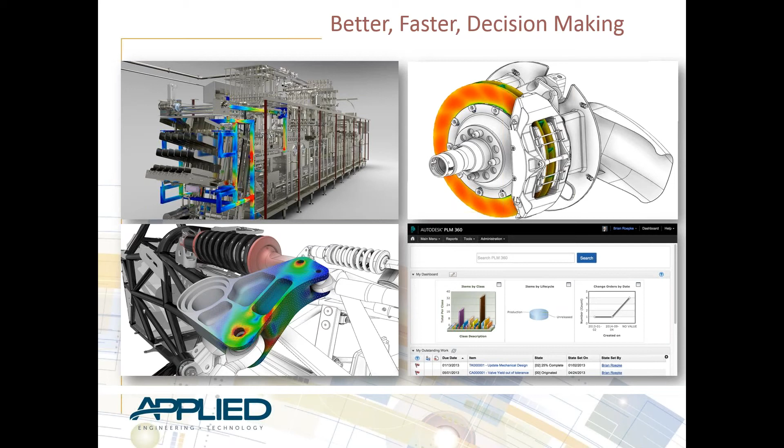So first and foremost, for process disruptors, we talk about fabrication. If you go back 10 years ago, how many people were using CAM software? Probably not many. I know there were a few, but today, in subtractive manufacturing, or CNC, we're seeing a lot more CAM. Computer-aided manufacturing uses computational power to generate tool paths for parts. Because of this quick nature and the ability to utilize the knowledge of the computer, we're able to start generating more complex parts of higher quality.

If you take that a step further and look at the new additive manufacturing, which is the trendy word for 3D printing, I think we have all seen this technology just explode. We have the ability now to print composite materials such as carbon fiber. We have the ability to print metals. We even have the ability to print organic materials now. Just the other day, I was talking to a baker who went to a bakery convention, and there's 3D printers now for cakes. They're 3D printing wedding cakes, which I think is just incredible.

So I think we all know 3D printing is here to stay. It's past just being a trend, and it's becoming much more mainstream. It's something we use for prototyping all the time. This is something that helps us create higher quality products. It helps us minimize the physical testing required, along with FEA analysis. Fabrication is really coming a very long way.

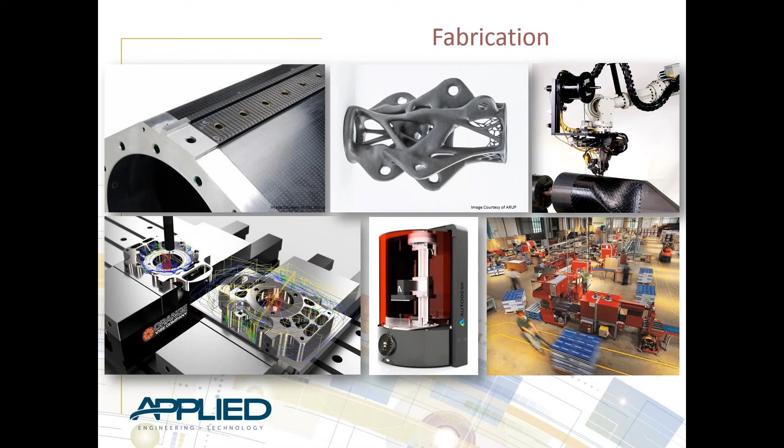Digital and physical convergence. This is the idea of doing more in a digital world, right? And that connecting with the physical world. In the past, if you think about a typical process maybe 10 years ago, it's, well, let's draw our design, let's generate that design in 2D in AutoCAD, and then let's make that design in our shop, and then let's apply some loads and pressures to it to see if it breaks. Kind of like the old school traditional process. And I know a lot of people are still using that process.

But now in today's age, we can do a lot of upfront testing. We can do a lot of upfront visual work for marketing material. We can simulate things before creating those physical prototypes to kind of eliminate some of that. One of the coolest technologies I think that's coming out, and I've seen become more popular in the last, I want to say, 2 years, is virtual reality and augmented reality.

And so that is the ability to, I guess, do one of two things. Virtual reality, you're putting your user in a 3D immersive world where everything is computer generated. I've seen a lot of aerospace and automotive manufacturers use this technology to prototype vehicles, right? They have kind of little mock-ups, but they use virtual reality to sit in a car, look at the dashboard, look at the rear of the car. They're looking to make sure it's visually acceptable before they even produce anything in the physical world.

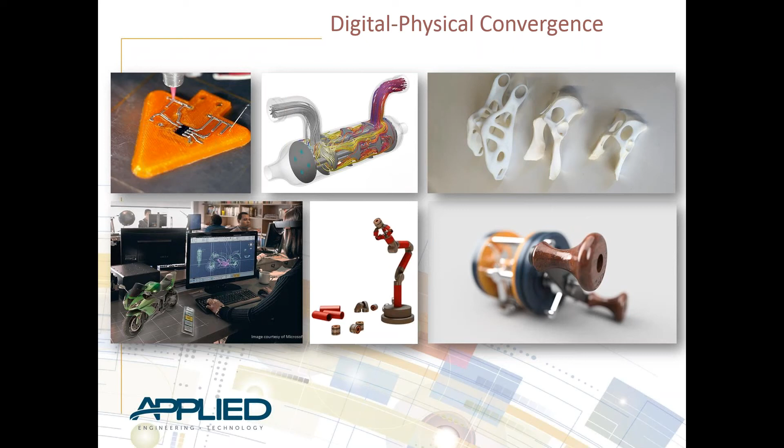So there's two things I want to talk about today when we actually get into the technology. With all those things I just talked about, we really kind of think back, well, how can I actually incorporate some of these new trends into what we do at my organization? The first being automating the collaboration between sales, design, and engineering. What I want to talk about here is a tool called Configurator 360, along with Inventor, and how these two work together to provide not only a cloud, mobile, and social application of collaboration, but how we can actually tie in sales to the process.

And so if we think about automating this process, think about your typical bidding process within your organization. You typically would have some sales personnel. They go talk to a customer. They get some information from the customer. They come back, and it's basically the telephone game. They take that information and share it with engineering or design, and it's a lot of back and forth, right? That's the portion we want to automate here, and that's what I'm going to be highlighting.

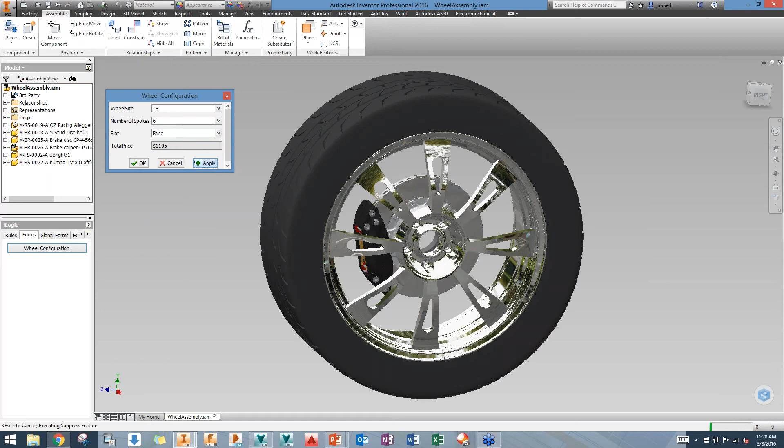If I change the wheel model from size 22 down to 18, I change the spoke size down to 6, and I turn off the slots and I hit apply, here's what happens. Inventor sees what I've done, it goes into my rules, and it understands that if these all change, then this has to change. And then it just republishes my new CAD geometry.

You'll also notice here the total prices are read-only. It's taking into account the information I've put into this form and giving me an estimated price of this configuration of this wheel. So that is really the iLogic portion inside of Inventor.

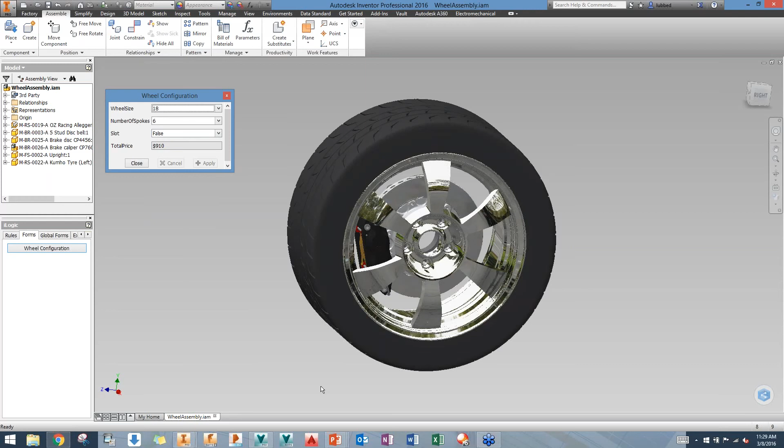When we want to push this out and make this accessible to other types of users outside of engineering, that's when we can get into more of the Configurator 360 application. So inside of Inventor, you have a button that allows you to publish your design to Configurator 360. I'm on the back end of Configurator 360, signed in as an administrator right now. So this is the administrator's view.

And you'll notice right away that this is built into a browser. So this is your cloud. This is your mobile accessibility to that same configuration you were seeing inside of Inventor, only now it can be accessed outside of the four walls of your organization. It can be accessed on your phone, on your tablet, on your work PC. You can even embed this into your website and have it do configurations directly in front of the consumer.

So you can have the consumer basically log on and say, oh, I want to configure a wheel, so I'm going to go through and choose exactly what I want. It's a more interactive experience for your actual customer.

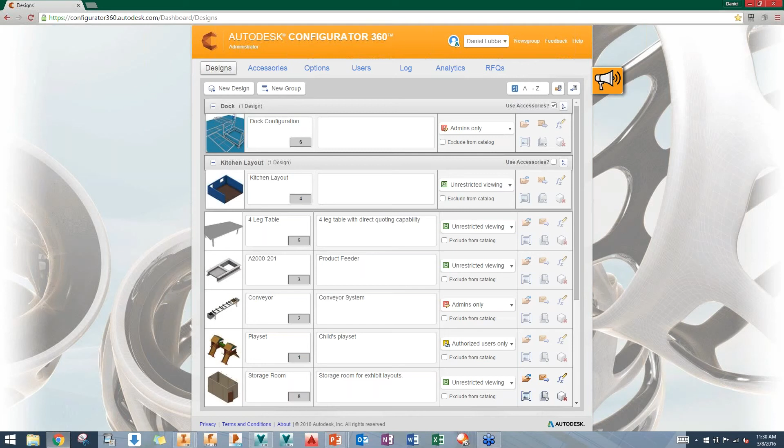Now, some folks don't go that far in giving the configuration ability to the customer, but they do give the configuration ability to the sales folks. So sales folks will sit down with their customers and do it together, maybe on an iPad or whatever, and they'll be able to configure this live with their customer, making sure they get all of the requirements, because they're basically going down a form A to Z.

So you'll notice in here I have almost like a product catalog. I give a lot of demonstrations of this software, so I have a bunch of different types of data being shown in here.

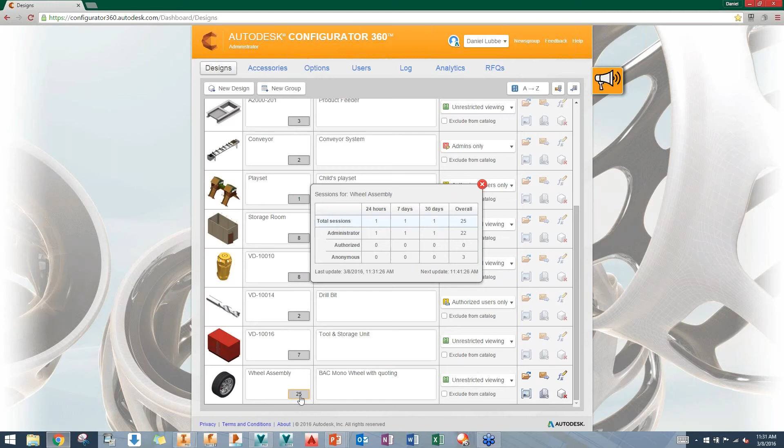But at the very bottom, I have this wheel assembly, the same exact model you saw inside of Inventor. And on the back end as an administrator, I can see the number of sessions that have been initialized, right? How many people have gone in and actually configured this model. It's nice to be able to get some metrics to see what's most popular, right? So you start to build off of other data that you get inside of this configurator to understand which products are more popular than others.

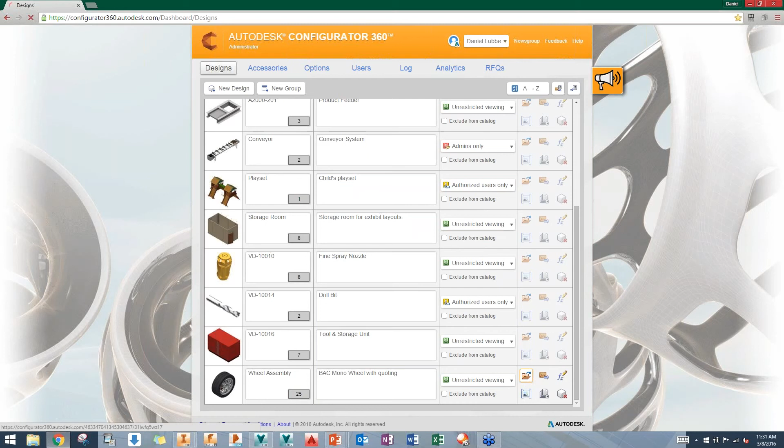But if I go to the actual view that the consumer would see, I'm going to click on this Go to Design, and this is going to open up Configurator 360. And what you're going to see here is the wheel in the center of the screen. So I'll kind of zoom in a little bit here. And if I let this sit for just a second, this is actually being run on Autodesk servers. Autodesk does not have access to your data. It's a secure location that only the administrator of your Configurator 360 tenant has access to.

So as this updates on the screen, you'll notice on the left-hand side I have 3 buttons. The very first one are the options I have to choose from. The second one is the ability to download information. So I'm still waiting for the screen to update. I've kind of already clicked through some of this stuff. But what we have here is somewhat of a sales tool, right? We have the ability to gather the requirements.

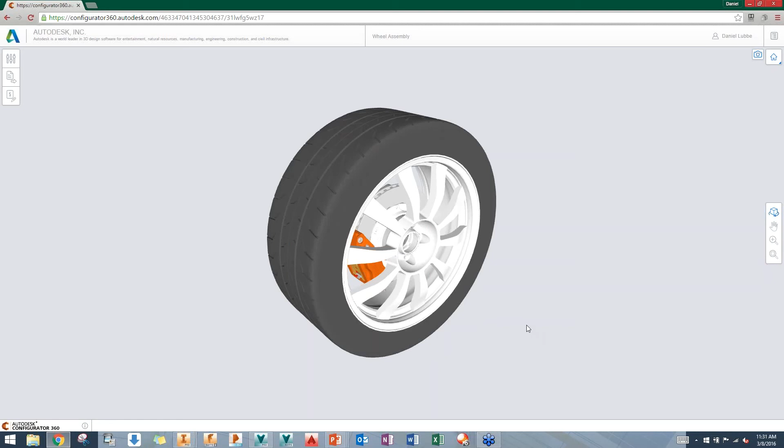We're giving the end user the option to download, and we specify what types of downloads they can get, right? Can they get the pricing information? Can they download an Inventor assembly file? Can they download a STEP file, right? Think of all the opportunities you have to utilize that download option.

When you have customers calling you saying, hey, we really like your product, but we want to have access to 3D CAD models because we want to be able to put your product into our design. How do you guys do that today? I feel like a lot of the customers I talk to are, well, give us a call and we'll have someone from engineering produce a STEP file, and then that person will email it to you. That's pretty common, and I think it's pretty cumbersome. You're taking time away from the engineers for a very mundane task. It's an important task that needs to be done, but is it really something that engineering should be doing? Configurator 360 gives you the ability to kind of eliminate that, automate that process.

So exactly what you're seeing here. I have all of my options listed here, even some additional ones inside of Configurator 360. The ability to choose my brake material, my wheel finish. You can group each of these parameters into different sections, right? You can also have cascading drop-downs. So if I choose this, then my next list has to be these items, right? So you can start to build out whatever your form is that sales goes and talks to the customer with. You can take all of that information, you can build it into this interface.

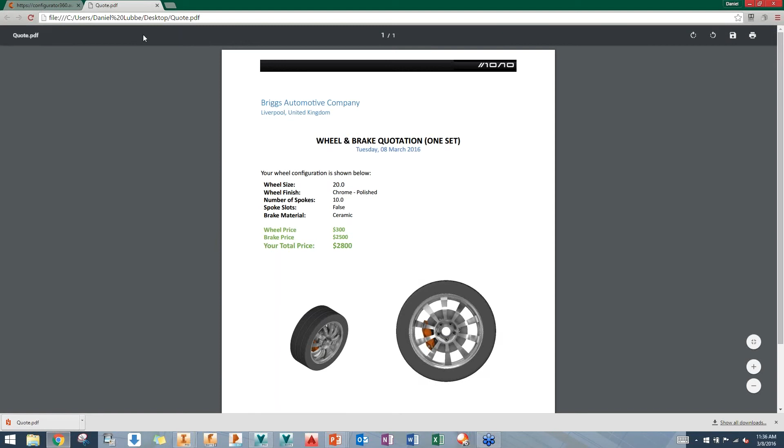This could be the sales rep on the phone with the customer or sitting next to them, helping them configure the product, putting in requirements, and then pulling down the appropriate pricing information right there on the spot. Again, pricing information does not have to be incorporated into this tool, but I feel like that's a very powerful thing to add if you have the ability to do so.

So that is Configurator 360. Again, you can access this anywhere you have an internet connection. Right? So again, tablet, mobile device, laptop, computer, it doesn't matter. As long as you're connected to the internet, you can access this configurator.

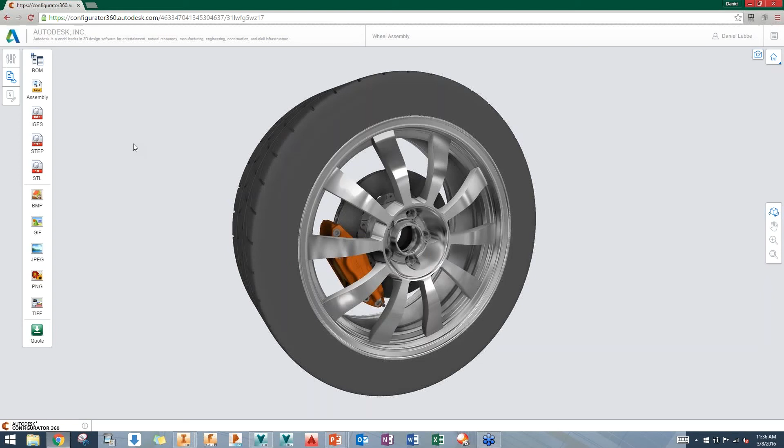So I'm going to back out of here and go to PowerPoint and move into that next piece of technology that I think most people are on this call for, to be honest with you. Generative design and shape generation is very neat technology, and it's making its way into mainstream, just like that configurator tool. If we move to the next slide here,

Shape Generator is a tool that basically aids us in design. I don't want to say that it's going to design for you. It's getting close to that Staples easy button, but it's not quite the easy button yet. What this allows us to do is take a block of material inside of my assembly, right? I know this block of material is going to be fixed here. I know a load is going to be applied here, right?

With those real-world conditions, I'm able to input that into Shape Generator, and using a Nastran solver in the background, it will gather the most rigid shape it can find to support the force and the fixtures that you've put into that blob of material, right? So it sounds kind of mundane, but when you really think about it, it's optimizing our design. It's using FEA in the background for us. We're not having to do FEA to find the shape we're looking for. We're allowing the computer to do it for us. All we're doing is putting in real-world conditions.

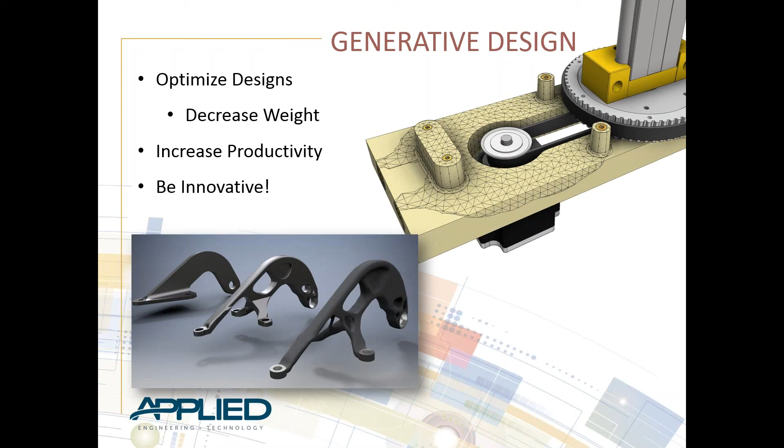But in the meantime, I look at this Shape Generator inside of Inventor as more of an aid in the design process. So let's take a look at how that is actually done inside of Inventor. I'm going to come to this Inventor assembly. I'm trying to minimize the movement on my screen, especially in CAD, because I know that if I rotate and it looks nice on my screen, for you guys it's going to be just a blurry mess.

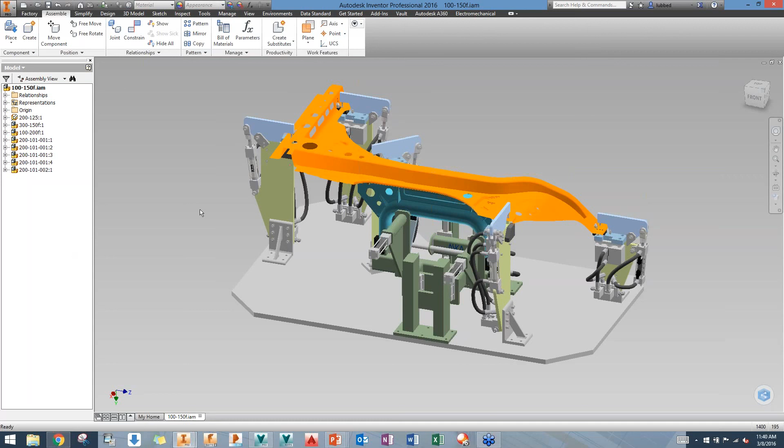What we're looking at here is a jig assembly that's holding a sheet metal part. Let me zoom in here. If we look at this component here, this one hydraulic jig on the left-hand side, there are many of the same, but if we just look at this one, notice this green block in the middle.

That is one enormous structural member inside of this jig. And there's some forces being applied to this. The jig is actually coming down on top to clamp down on this sheet metal part. Wouldn't it be nice if we could just remove some of that material? And most folks would say, well, yeah, I'll just put a hole right in the center of it. Like, yeah, you could do that.

Absolutely. You could run some FEA on it afterwards to verify. But is putting a hole right in the middle actually the best place to put the hole or to remove material? That's where Shape Generator comes in. I can take this bracket. Let's actually open this bad boy up.

What I'll do is I'm going to come into this individual part. I'm going to turn this to the side a little bit. I'm going to let my screen update for a second.

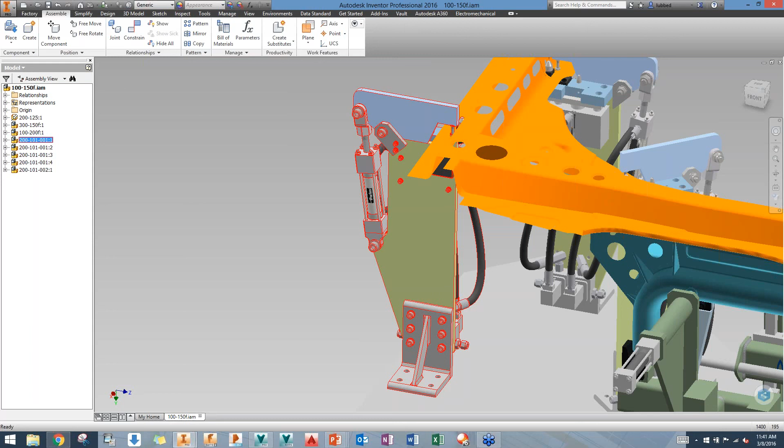Sorry, guys. My Wi-Fi I thought was pretty good, but it doesn't seem to want to update very fast. Okay, so I've seen it. Okay, so we're there.

So here's my part. Again, I know that I'm clamping on this top little extrusion in the upper right-hand side of my screen. What I'm going to do inside of my part is I'm going to go to Shape Generator. And what this does is it actually almost opens up. It's basically prompting me. Let me see here. I just pulled this part out of Vault. Okay.

So it's actually bringing me into somewhat of an FEA-looking environment. For those of you who have used FEA, you even see an FEA type of icon, and it says analysis in my tree on the left-hand side. But really all we're doing inside of Shape Generator is we're working from left to right. Just like all of our FEA tools, we start by assigning material.

So I come in here, I'm going to assign just an alloy steel material. I'll come down here and choose that. And this may be a little behind. I'll try to go as slow as I can. Once material has been applied, then I can come to constraints.

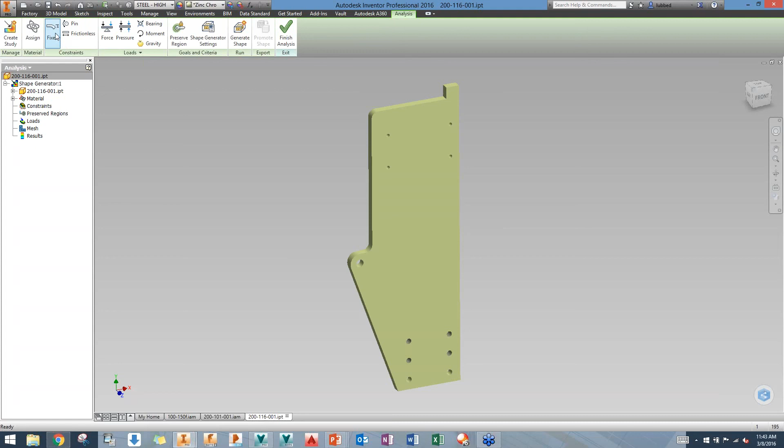So where is this thing being fixed in the real world? In its real world condition, it's being bolted to brackets that are attached to the skid. So I'm going to grab these 6 holes here, and I'm going to say these are fixed in place. Okay, so we know where that thing is being fixed.

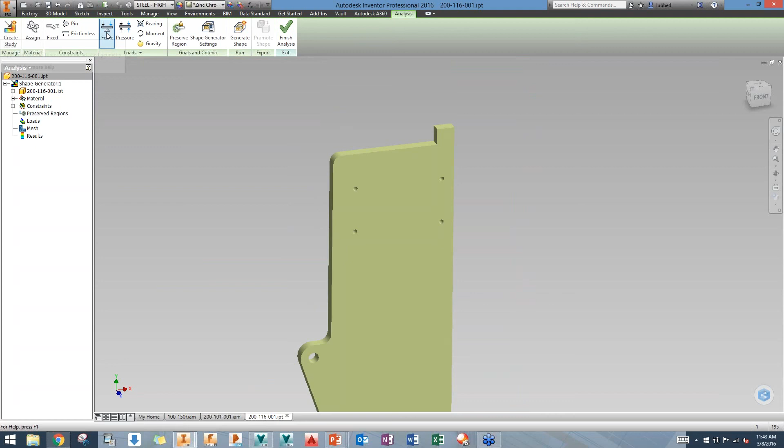Next, where is force being applied? Well, I know I have almost like a piston over here, and we'll say that this piston is putting on 1,000 newtons of force. So we'll apply that. And then at the very top, we have these 4 holes that have additional forces being applied at each of these faces.

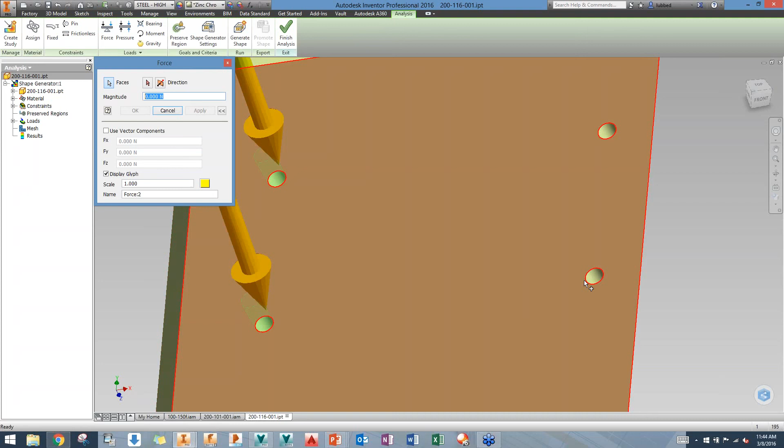And here you'll notice my force is at an angle. I can specify an edge to make sure that these forces are going down. And here we'll say the magnitude is 300. Right, so again, I'm just applying my real world conditions.

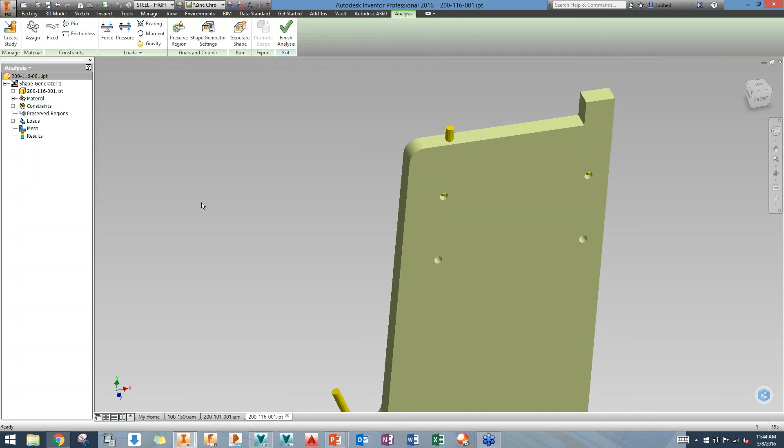Now, I could run this right now with Shape Generator. What it's going to do is maintain the faces that I've selected. I've selected where the forces are being applied. I've selected where this part is going to be fixed, and it would maintain those circles and those holes. But I want to make sure that there's more material around those holes. So what we have after we apply force is preserve region.

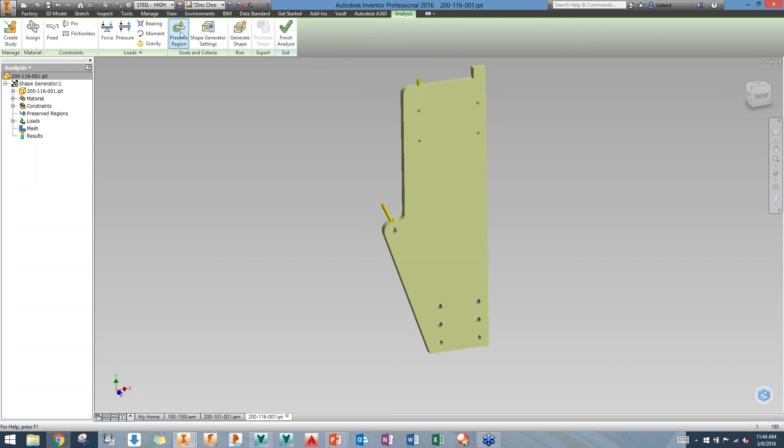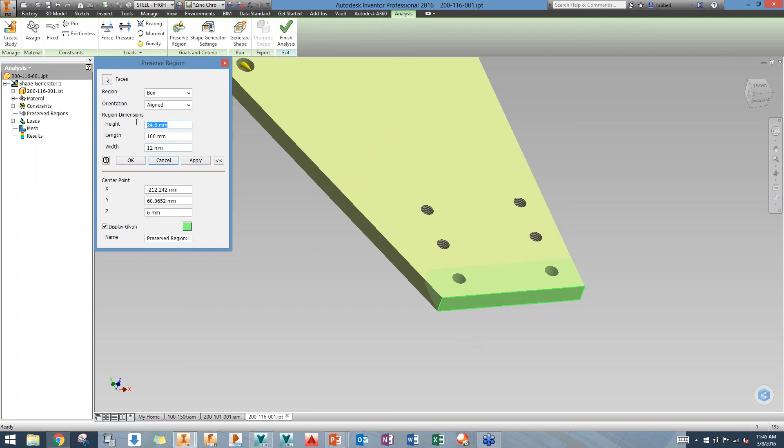And so what I can do here is choose an edge. And what this does, and it may be kind of hard to see here, but I can actually choose material that's in my quote-unquote blob to maintain. So what I'm going to do here is make this box a little higher. I'm going to change the height here to, let's go 90.

And I don't know if you guys can see this. It's probably kind of hard to see, but I have this highlighted green area. This is almost like a keep out. Like, hey, when you go to remove material, don't remove any of this material. So I'm going to apply.

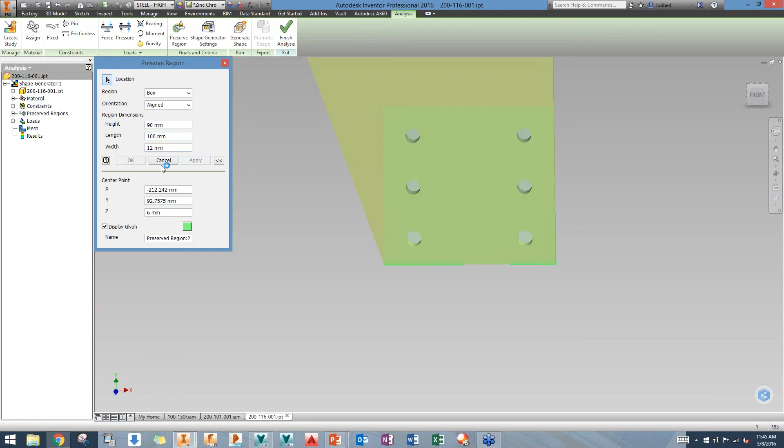Then I'm going to come up here. I'm going to choose this edge right here. So I'm going to grab preserve region again. You'll notice when you grab an edge, it makes the appropriate diameter. So I'll apply that one. I'm going to come up here, grab this top face, let's move this one down 70 or so, just to make sure that we're capturing where that clamp is actually coming down.

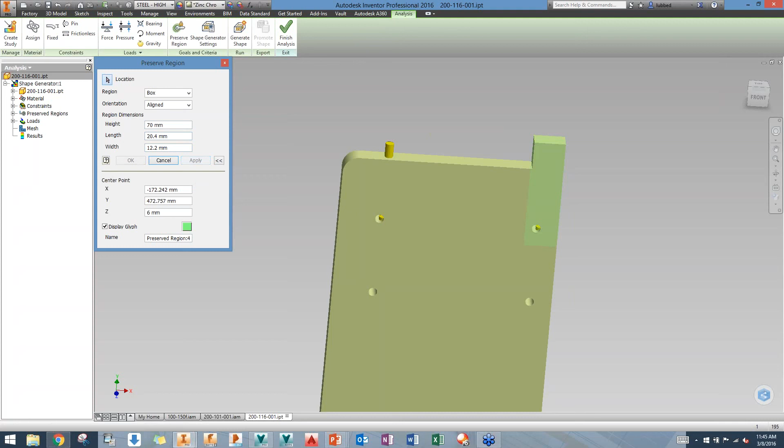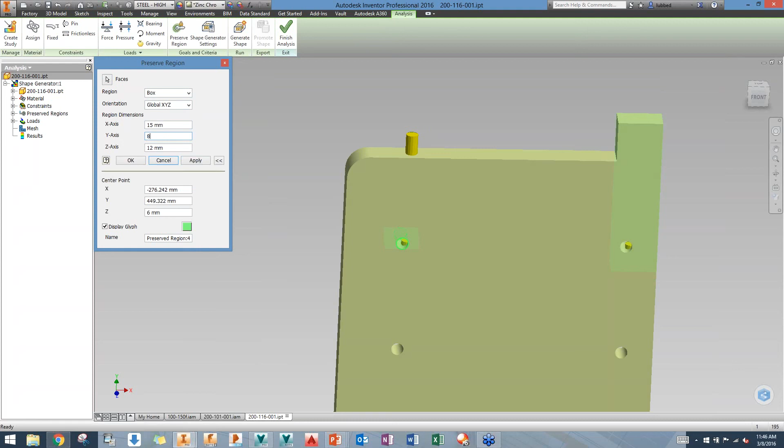And then very lastly, let's grab this circle here. By default, when you grab a cylindrical surface, it wants to make a region that's cylindrical. But I want this to be a box, and I'm going to change size and shape to about 15 wide by, let's say, 80 tall. Right, and so it's now capturing kind of this region over here. Hit apply.

So once I've done my model, I've fixed it in place, I've specified the loads, and I have specified the keep out section for removing material. I'd say the very last thing is to come into your shape generator settings. One thing I want to point out here is this is my objective, maximize stiffness. This is the first time this technology has been put into Inventor. This is our objective today. But if you notice, and I can't say much more, this is a read-only drop-down list. Nothing else is in the list today, but I'm going to allow you to imagine that this could potentially expand into some other types of objectives in the future.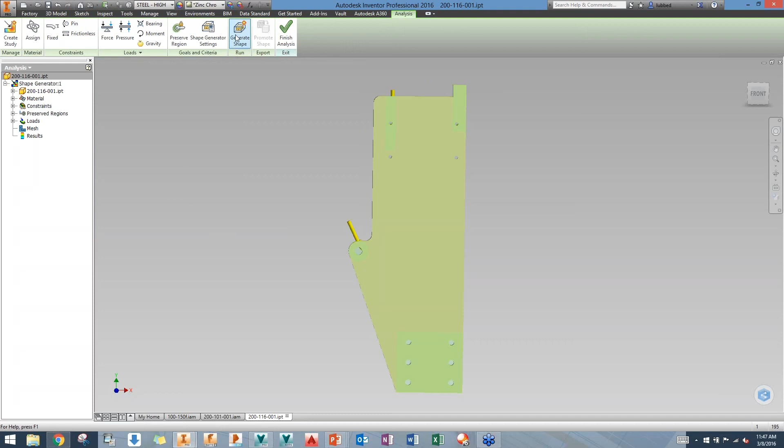So here I have reduce original material by specific percentage. So let's just choose, I want to reduce 40% of the mass. So I see my original mass, calculating the current material, and it's going to give me my mass target of 3.44. So I'm going to say OK, and all I'm doing now is generating the shape. So I just hit run. I let the software do the work.

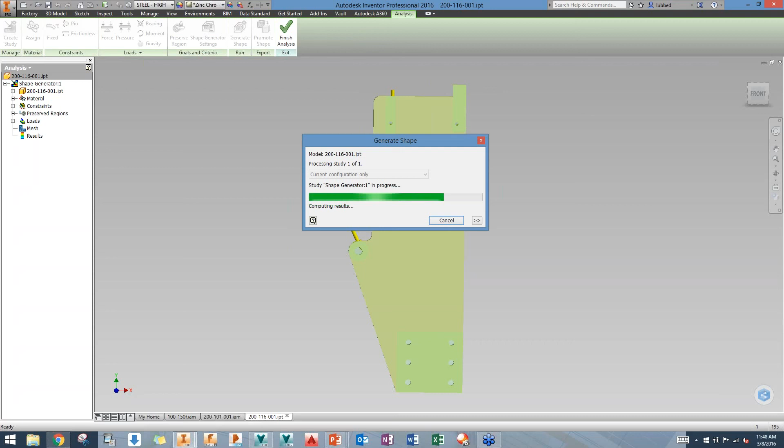So what this is doing, it is an FEA environment. Again, Nastran is running in the background as the solver. It is meshing this model into tiny little geometric shapes and then running algorithms and calculations on those shapes to figure out where those loads will move through the model, and where those loads are not moving through the model, that's where it begins to take away material.

And so what we're left with is this very kind of semi-organic shape. There's a little bit of prismatic nature to this shape, but that goes back to when I was saying this is an aid in the design process. I already now can look at this and say, oh, this actually makes perfect sense why this would be the shape with the loads that are being applied to this thing. So this is a very simple example. This was a prismatic shape to start with. It wasn't anything with very lofty, curvy surfaces, but you probably wouldn't do a lot of the lofty, curvy surfaces until you did the shape generator.

So I hope that this helps you look into the future of, hey, this is something small right now, but this is something that could really help us. I know that the aerospace and automotive industries are becoming fanatical about this type of technology, because they're super into lightweighting components, but I think you guys will find that this is a very powerful technology. It's new to Inventor, not new itself, but it's something I really recommend you try.

I've been in the CAD industry for 10 years. I had never really used a shape generator before, and when Inventor received this technology, I didn't look through any tutorials, because I always like to see how hard it is when I first do it. I just came into this interface, and I worked from left to right, and I just made a circle with a hole pattern in it, and then put some radial loads on it or whatever. It was so easy to use. I couldn't believe how easy this tool was. And so I highly recommend that you try this technology as soon as you get a chance when you're running Inventor 2016.

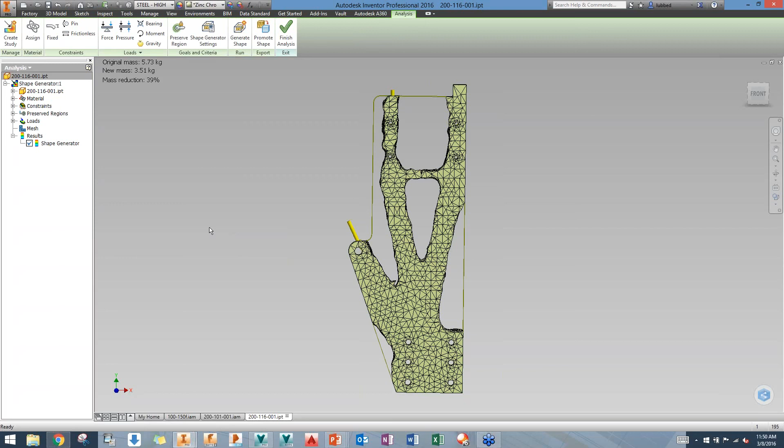But with that, that's what I had for today. Let's go back into the actual PowerPoint. Oops. Where am I at here? Sorry, I got too many things open.